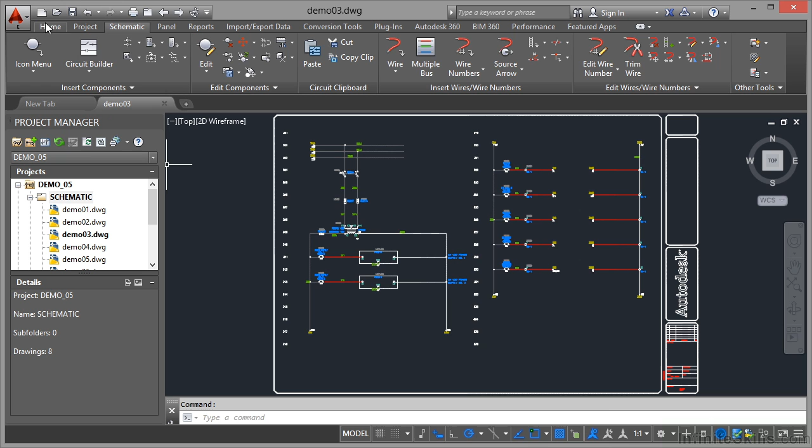Now I do not have the startup variable switched on, so I will just get the templates folder come up when I click on New up here on the quick access toolbar. So I can select an existing template. Always try and use existing ones. It's much, much easier. So you can see here I've got all these ACE, ANSI American templates there.

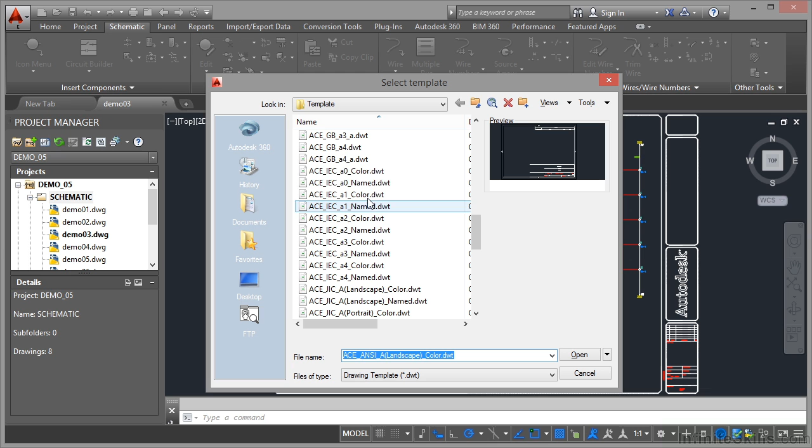And as I come down, I've got DIN, which are European templates, GB, as you can see, and I've got a whole load of templates. I can use IEC, the European electrical standard, JIC, the American Imperial electrical standard as well. What I'm going to do is just use the basic AutoCAD Electrical DWT.

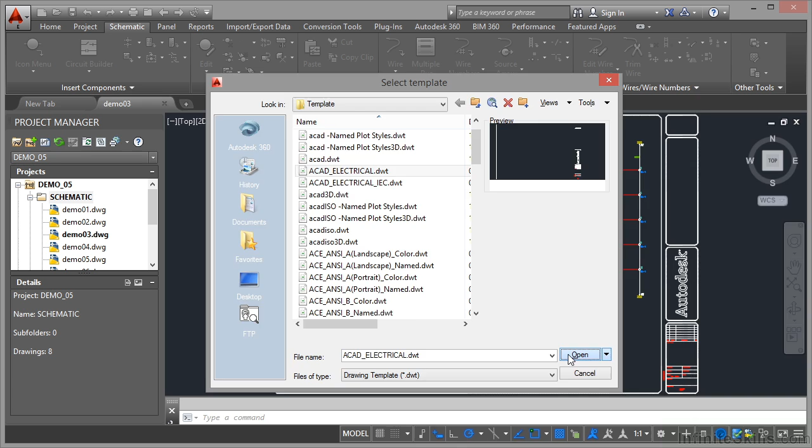Now the IEC is the metric one. The one without the IEC is the Imperial one. So I'm going to select that there and click on Open. Now you'll notice as soon as I do that, I get a blank new drawing. The grid is switched on. I'm just going to switch those off down here on the status bar. Grid and snap are off. Double click on the wheel to zoom extents like so.

It centralizes it nicely. Now at the moment, if you look at the top of the screen, that's just a default drawing4.dwg. Now what I'm going to do is I'm going to do a Save As on that. And what I can do here is very, very easy. I can go here and add Save As to the quick access toolbar. That's something I would suggest that you do anyway, right at the beginning when you start using AutoCAD Electrical.

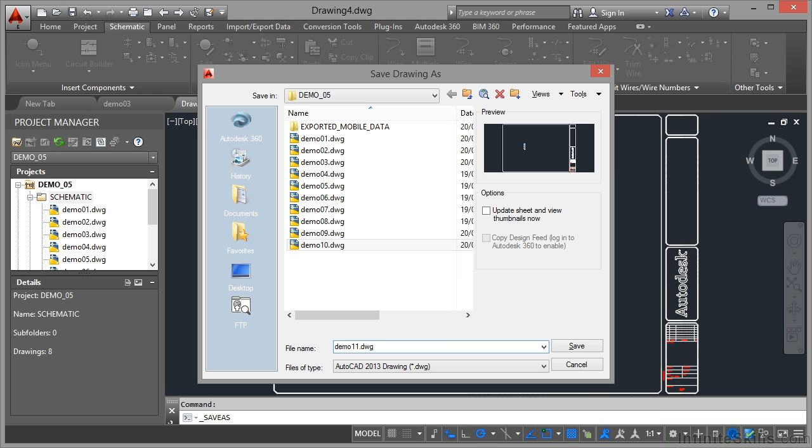So I'm going to do a Save As, and you can see that I'm already in the Demo 05 project folder. This is why we have AutoCAD Electrical projects, because all of these projects and the project data look into this folder. Now, the last drawing I created was Demo 10 for the connectors. So I'm going to go in here and make sure that this is Demo 11. Click on Save, and that is saved now to the project folder.

I'll just go and click on Save again up here, just so that all we see is Demo 11. Much, much easier to recognize than that big long path name. Now, that hasn't been added to the project. It's just a drawing in the project folder. So what I'll do now is I'll go to Demo 05 and click once on it there.

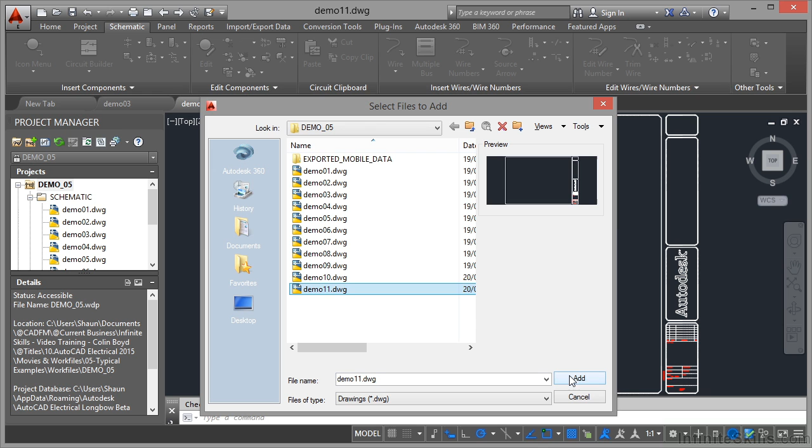Right click. Now this does go off the bottom of the screen, but the bit we need here is Add Drawings right there. As soon as I do that, again, it's looking in the Demo 05 project folder. There's Demo 11. I'm going to add that to the project, and it'll ask me now, do I want to apply the project default values to all of my drawing settings? Now we will look at this later as we work through the course, but I'm going to say yes.

Now that'll update the project, but what it will also do is add that to the project list. So if I look down here now, you'll see that Demo 11 has ended up down there. So I actually need to move that up like so and put it into the list underneath Demo 10. So that is now my current project drawing using an existing template.

Always use existing templates. If you've got some existing templates at your place of work, but they're not in AutoCAD Electrical, use one of those. Take all the data out of it, save it as a DWT file, put it in your known template folder, and use that as your existing template. Then all you've got to do, like I've shown you, is add that to your project when you're running your project in the Project Manager in AutoCAD Electrical.